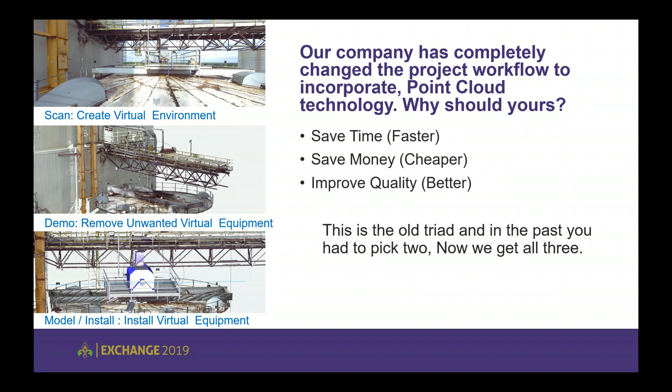How does laser scanning help us? Again, our existing drawings are out of date. They're really no good. We've not done a good job over the years of having as-builts. Our installers have installed equipment that doesn't exactly match the drawings. So as we try to put equipment into these brownfield facilities, those pieces of equipment simply don't fit. We had a lot of collisions and quite honestly a lot of cost on these projects because the existing knowledge of these

facilities was so poor. And typically our prints do not show things like electrical boxes, conduit locations, compressed air lines; everything that we expect in these facilities simply doesn't show up in the drawings, but does show up on our laser scans. And basically the real world is crooked and crazy. There's really no straight lines or round circles. So we needed something to pick that up. We wanted a way to design equipment so we could slide it in within a half an inch of the existing equipment. That can't be done with old school technologies.

The advantages of the scanning: we don't need existing drawings, and I've said that a couple times. We simply scan the area, create a point cloud, and then during the construction process, we can actually measure against the models and the point clouds to see if the equipment's going in exactly as planned.

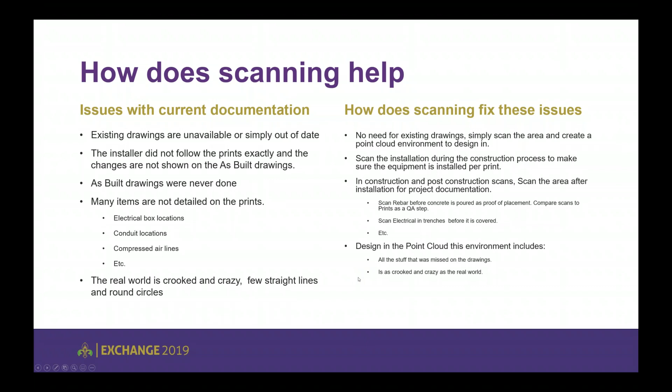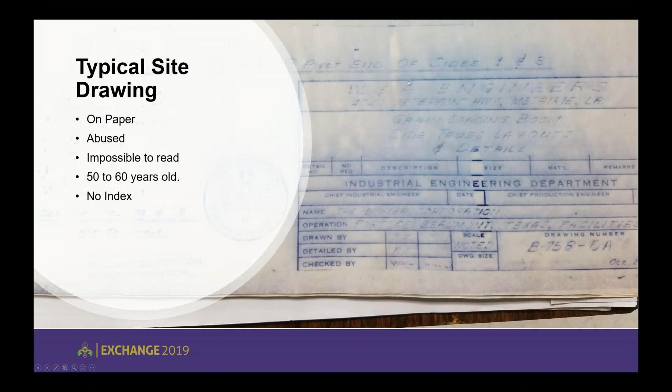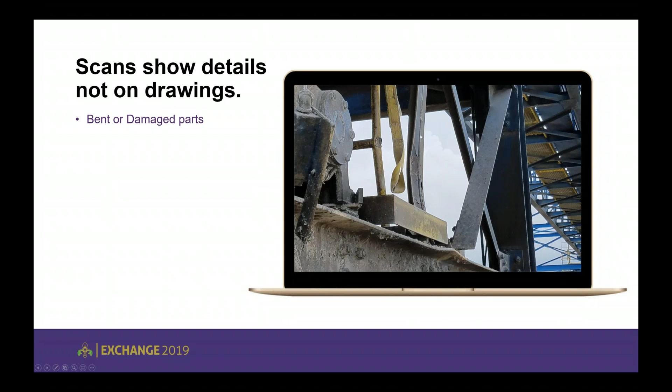I don't know about you guys, but my drawing sets in these old facilities, some of these things are 50, 60 years old, and they've been water damaged, and they're simply abused. The other thing that the scans will bring up is it'll show us the bent and damaged parts. So a lot of times these facilities have been beat on in various ways, and the equipment has been moved around. This will actually allow us to avoid interferences for the existing facility.

Again, electrical parts aren't detailed in any of our prints. Typically, they'll be one-liners, show electrical goes from here to there, but it doesn't exactly show where each conduit is. The picture that I show here is actually a place where we had to replace the conveyors underneath this electrical, and we had to come within a half an inch of this electrical, and there was no other way other than to scan it.

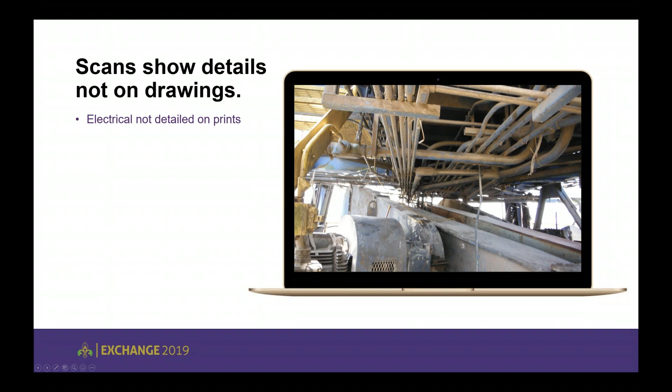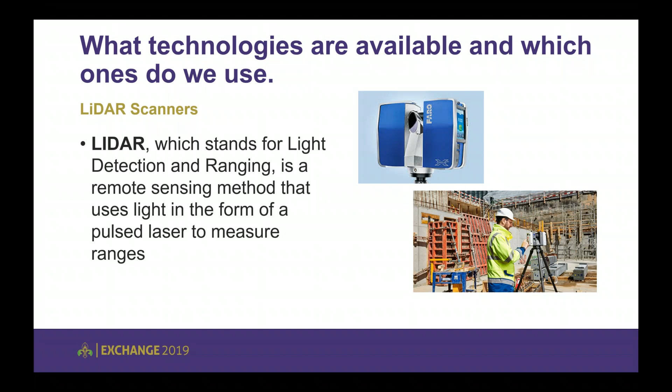What technologies are available and what do we use? Our main technology is to use a LiDAR scanner. It stands for light detection and ranging. They're extremely accurate devices. We have a FARO 330 that we use constantly. It's in the field pretty much all the time.

The advantages, they're fast. You set up a single point scan and it will pick up around 2 million points per second of accuracy. And I'll show some pictures of what these points look like, but basically they're a free point in space that has an XYZ coordinate to them. They're measurable, they're actually colored, so they look like photographs, and they're extremely accurate. Again, over 1,000 feet we range plus or minus 2 millimeters. That's way better than any other drawing that I have.

Angular accuracy, I show it on the presentation. It won't mean anything but 19 arc seconds for vertical and horizontal, which is quite accurate. Captures a really rich point cloud, which I'll show some presentations of here in a minute. There's some disadvantages. Line of sight. Basically, a laser is a beam. It goes absolutely straight. So you have to set these up in multiple locations to get presentations from all sides of the thing. And again, I'll show some of these in a minute here.

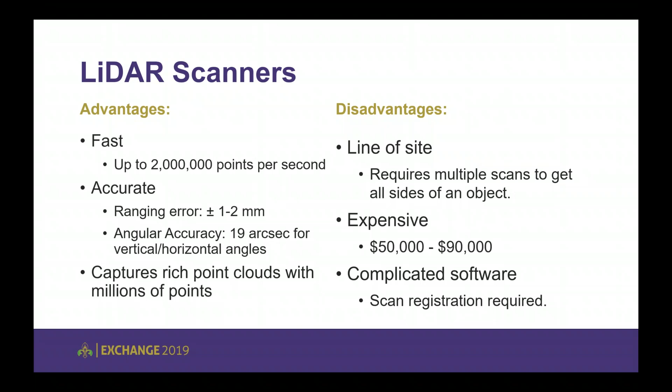They are expensive. You can buy a used LiDAR scanner in the $50,000 range. A brand new setup, latest technology, all that nice stuff is in the $90,000 range. So they're expensive, but I've paid for my LiDAR scanner at least 10 times. Suppliers that we use and recommend, again, I have a FARO 330. It's the one shown in the upper picture. They have a newer scanner which is twice as accurate. Obviously at $90,000, we're not really going to go out and buy another one since ours works perfectly well.

And then Leica is the other manufacturer. If I was to go buy a scanner today, I would buy a Leica. They're much faster. They have the advantage of being able to do registrations, which again, I'll show you some of these things in a second, but they let you do registrations on site, on the fly, and they know when you move them, how far you've moved them. So the whole process with the Leica scanner is faster. It's really no better than the FAROs, except for the fact that a FARO scan for me takes about 11 minutes a scan, and a Leica scan takes somewhere in the 2.5 to 3 minutes a scan kind of thing. That adds up as you do these in the facilities.

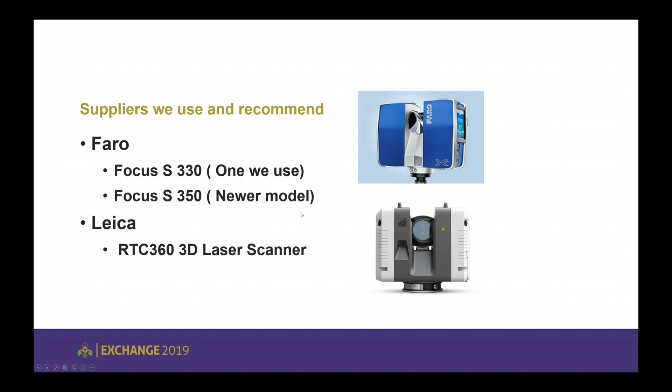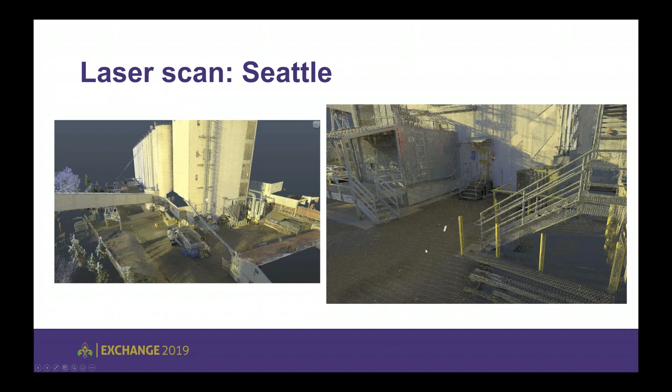We again scan each one of our facilities. This is a facility we have in Seattle. It's a grain elevator and a ship loading facility. What you end up with these 3D scans is very highly accurate positioning of all the equipment. They do tend to be a little bit pixelated, but again, that's a very high density for measurements.

We do use drones and use photogrammetry and orthomosaics. Those basically give us similar point cloud scans. They're not quite as accurate, but for getting to places, tops of buildings, tops of conveyors, all those things, we can merge the information from the drone photogrammetry in with our LiDAR scans, and so we'll get a complete 360-degree view of all of our equipment.

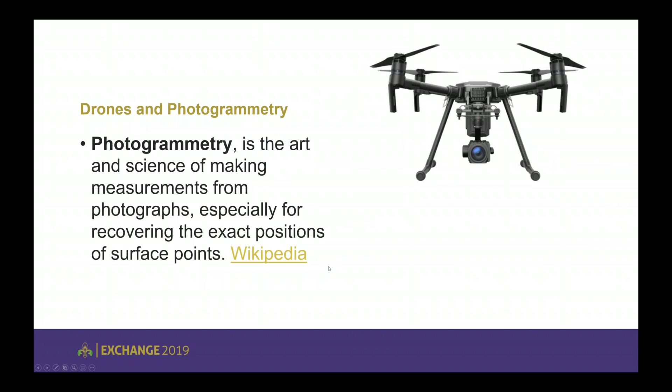What do we see, and what do we do with the drones and why? The drone imagery is automatically uploaded to the cloud. I'll show you the website and how we go about doing that. Its accuracy is about 2 to 4 pixels, which is about 1 centimeter. It captures a really nice point cloud.

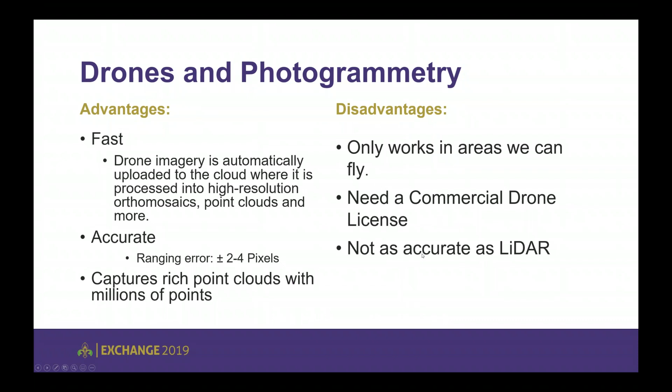Disadvantages, it only works where you can fly, and you do need a commercial drone license. They're not particularly hard to get, but you need to do that before you can fly. Once in a while, you get yourself caught in a place where you can't fly legally because of flight restrictions. They're not quite as accurate, as I said, as LiDAR.

This is a picture of a drone scan of the same facility. You can see that it's a little bit more pixelated, but again, highly accurate and quite capable.

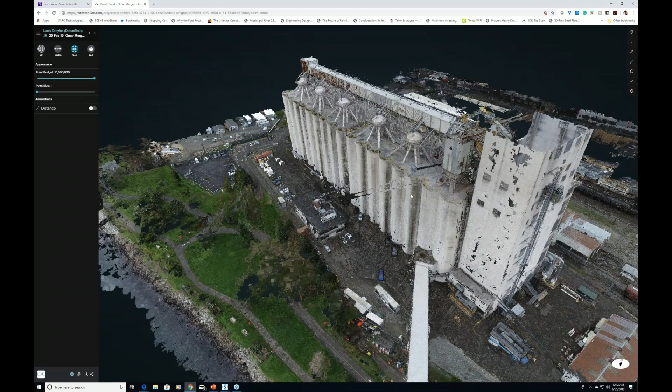I'm going to switch over to the drone software here real quick to give you an idea. This is that same facility in Seattle. This is a series of flights, about 300 photographs of the facility that we've turned into an orthomosaic. This took about an hour to fly and process. So you get very good accuracy in a very short amount of time.

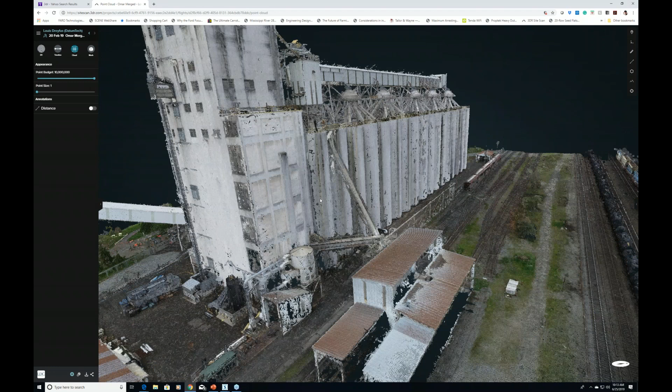Again, very rich information for something you do quickly. We merge these along with our LiDAR scans, so it gives us the ability to build 3D representations of these facilities very rapidly.

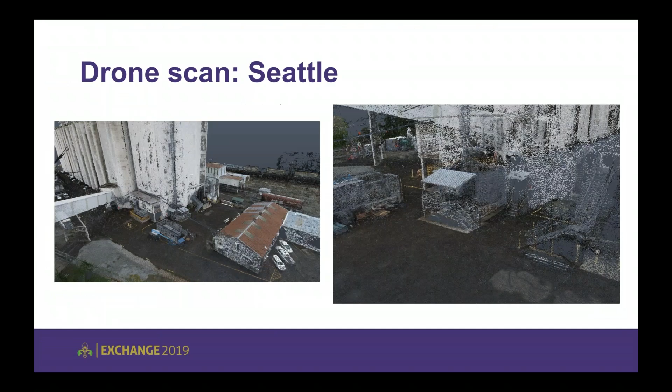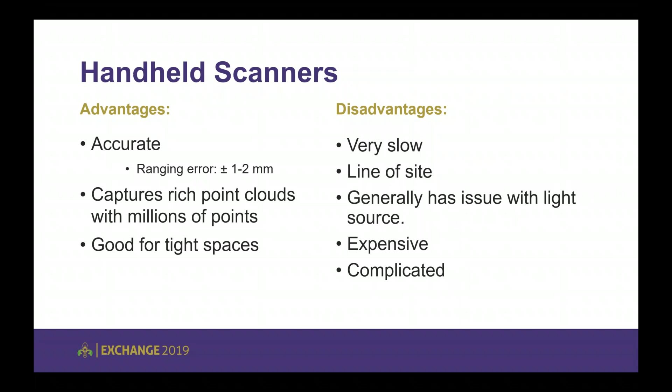The other technology, and quite honestly, we don't use this one, are handheld scanners. You'll see a lot of them out there. They're good if you're going to scan the inside of your car or something like that. They really don't work well. They're slow, very sensitive to exterior light sources. They're expensive and complicated, and we just haven't found a home for them.

The other useful device that we do use is VR viewers, virtual reality viewers. I have an HTC Vive, which is a headset and a ranging thing that you set up in your office. We do virtual reality walkthroughs for our facility. We do them from a safety standpoint - we'll put the safety managers under the headsets - and we do it from an interference standpoint, where we literally put our operators and people in virtual reality headsets and let them walk through these facilities as they are constructed.

Again, software - Autodesk is at the lead of all this stuff right now. We do use SolidWorks, but Autodesk ReCap, Autodesk Inventor, Revit, which is their building information modeling, and then as a free tool, we use Navisworks to pass these things around.

They're really at the leading edge of this technology. We use Faro for doing the virtual reality viewing and the point cloud registrations, which I'll show you in a minute. We do use SolidWorks, but only for 3D modeling, and their point cloud capabilities is atrocious. They simply have stepped over that piece of the world and aren't interested in doing that, or at least don't show it in their software.

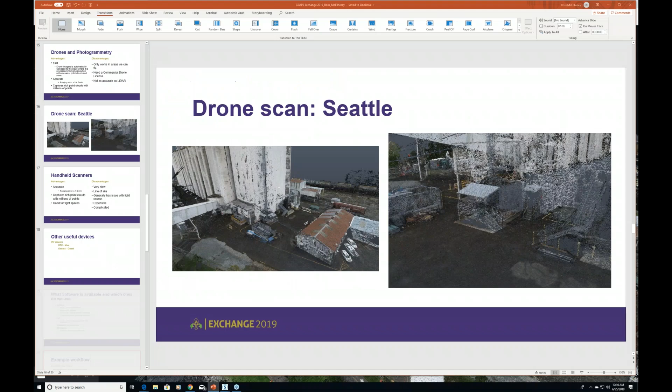Our workflow basically, as I stated before, is we build a cloud point. What is that? I'm going to open up the software for the cloud points. This is a software called Scene. What you're going to see is we will go out to this site, and on the left-hand side, you see I've shot 1, 2, 3, 4, 5, 6, 7, 8, 9 scans of the facility. What you end up with is a kind of dot matrix configuration of the facility. I'll stop here in a second.

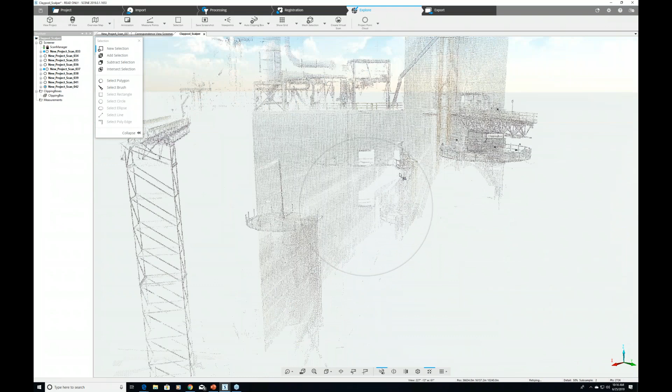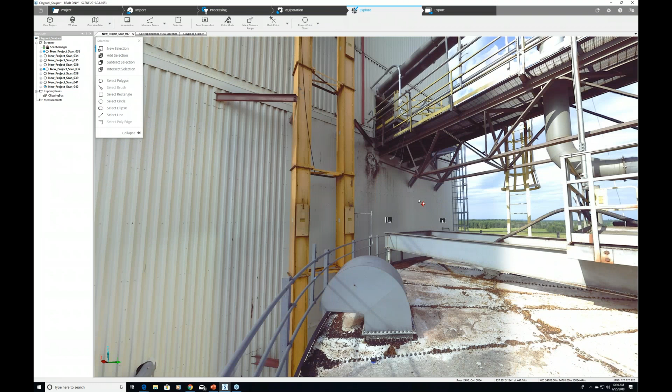What we're working on is this stuff on the left-hand side, where I have an existing piece of equipment, in this case an aspirator, and what we want to do is basically replace it and put a new piece of equipment into it. So you shoot single scans. This is the output from one scan from the laser scanner - again, very, very highly detailed, but it only shows one side of the equipment. In this case, I'm sitting up on the deck waiting for the scanner to finish, because it takes about 11 minutes to produce this amount of information.

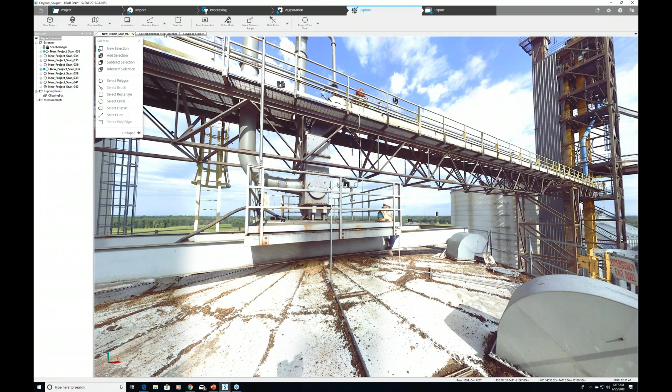Then what happens is you have to position the scanner in multiple locations, and you see pictures of the scanner on the screen - those are the multiple locations where I set the scanner up. Each one produces a portion of the cloud point. So basically each one of these scans, you can see where they were positioned, and each scan is its own thing. I'm going to move one out of the way so you can see it as what it picked up.

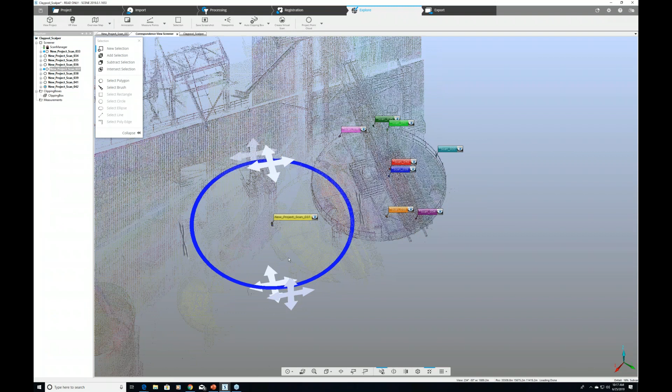And this software registers these pieces of equipment, or these scans, all together into a single basic mosaic of all of this information. From that, we can measure where each piece of equipment fits, or measure the existing equipment that's there, and I can place 3D models into this facility. So I'm going to go back to my presentation. Basically what we do is we build and register CloudPoint.

So we've built and registered this piece of this information.

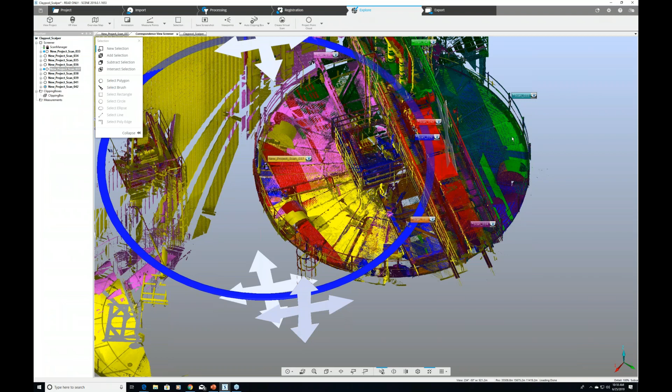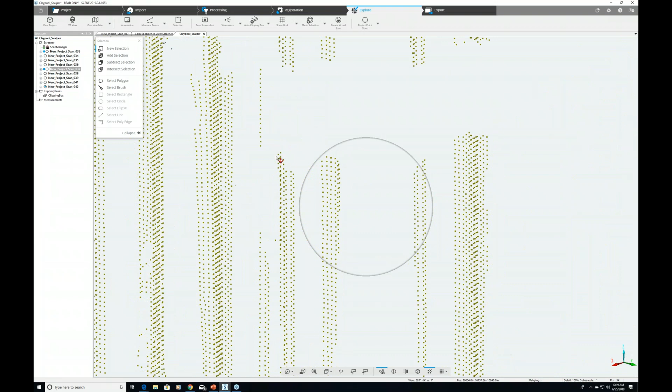If you zoom down to the bottom of this thing, all it really is, is a series of points, dots. Each one of these dots has a position in space, a 3D position. Each one has a color, and they actually are a plane, so they have a direction that the laser shot them at.

So now you have a 3D representation, there it is, of the equipment that we currently have in place.

Then the next portion of this, after we've registered these all together into one big picture, is you need to geoposition them. This looks like a minor point, but you need to place these scans in relative position to the world around it.

Basically, what we want to do is pick on one of these points and be able to get a survey location from it. All of the software allows for tools to do geopositioning. You have to survey 3 points, put those into your cloud, and from that you can geo-position the entire cloud point so that it matches real world. Basically, you can virtually survey points onto the thing.

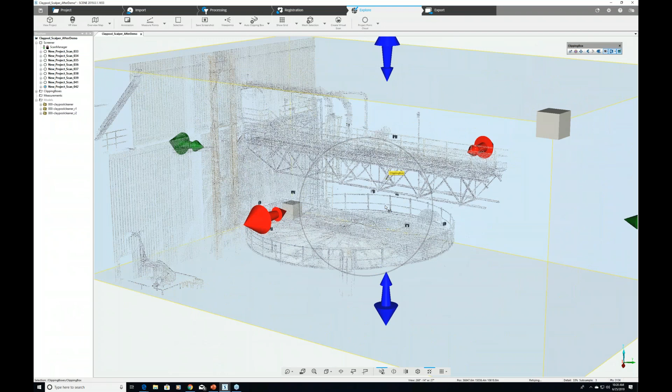Then what we do is create a demolition view. So basically, now let's go back the other way - I set one up for demolition. In this case we would create a clipping box around the outside of this. This portion is a whole lot like Photoshop.

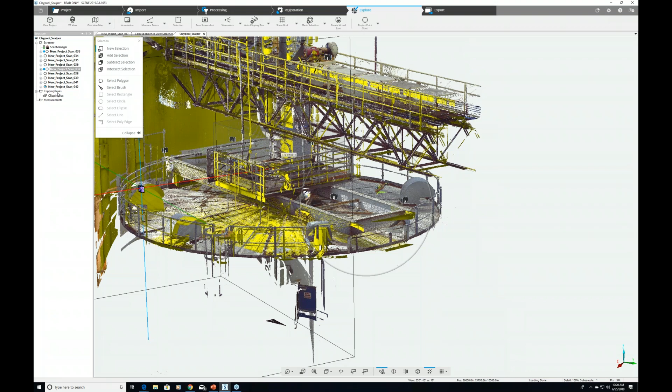Basically, you're going to go in and erase the things that you don't want in the facility. The easiest way to do that is I create a clipping box. So now this is the piece of equipment I'm not interested in anymore.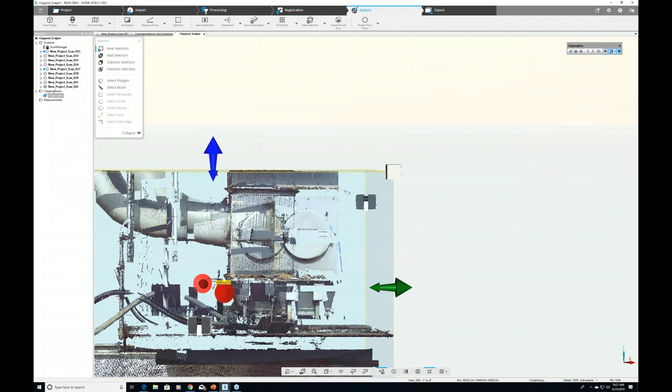We want to virtually remove it like we were doing a demolition in the facility. I would pick a piece of it and say, I'm not interested in this thing anymore, and delete those points.

You would very neatly go back and delete all the things that are no longer required out there, just like you were demolishing them mechanically. We remove all the unwanted equipment. Then we would come in and create 3D models.

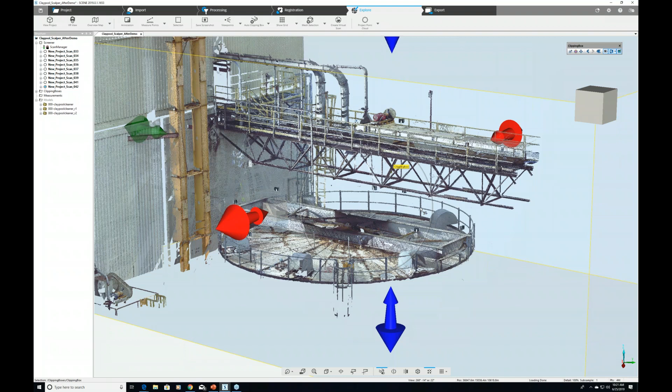So here's the demoed view of that thing. I've taken all the equipment that we don't want in this thing anymore. We went into, in this case, SolidWorks, and created a set of models.

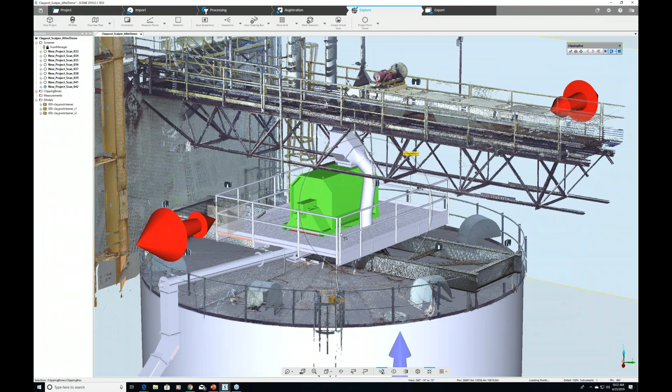So now we've modeled up the new equipment, checked it for interference, done virtual reality walkthroughs with this thing. So now that new equipment is in place.

And quite honestly, we can put this stuff in, and this equipment has been installed in this facility, and I missed that beam by about a quarter of an inch, and that's the level of accuracy that we get.

So now we've produced a point cloud and then installed new equipment into that system. From that, we now have a set of 3D models. I added those models to the point cloud. From that, we can do virtual reality walkthroughs.

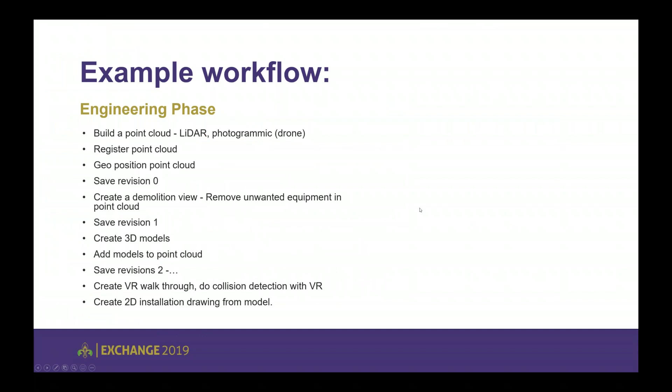Let's go back up here. We've gone through it, talked about all these things, so I'm just going to skip through them. Registering, again, I did that on the fly for you. Geolocation, remove the unwanted parts, add 3D models.

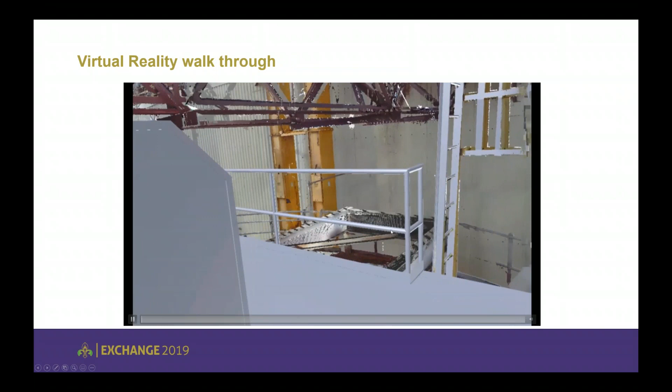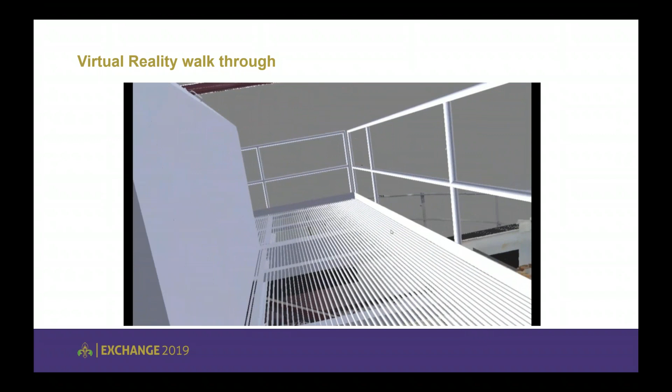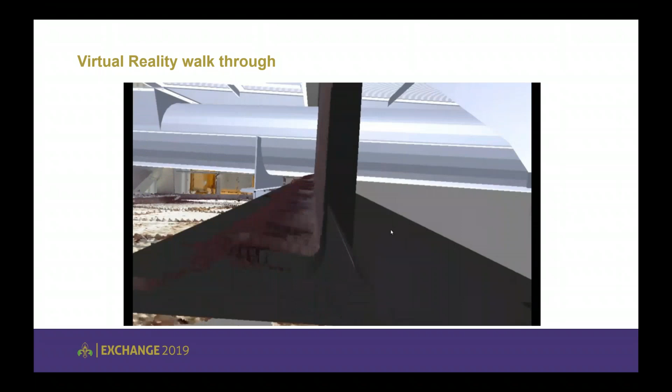And then this is the output from a 3D virtual reality walkthrough. You can actually physically get on the piece of equipment, look for gaps, look for places where your handrail doesn't meet OSHA, look for interferences underneath the thing. Basically, you can go through like you were installing this equipment. Our intent is to be able to do this in field and move to augmented reality.

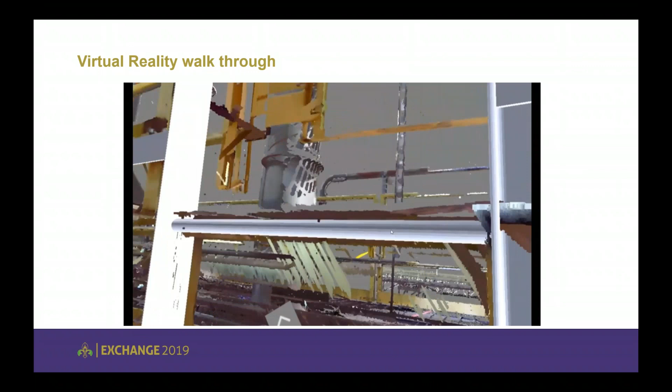Those tools really don't, they exist, but they're really expensive and really hard to do. But basically, we get a virtual environment. The point cloud produces us a virtual environment. We build virtual equipment in the models, and then we virtually install it.

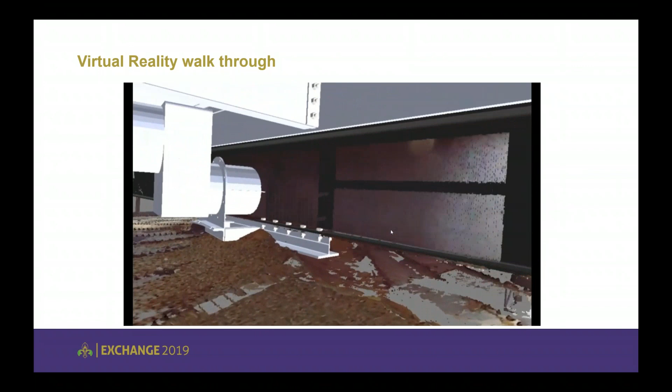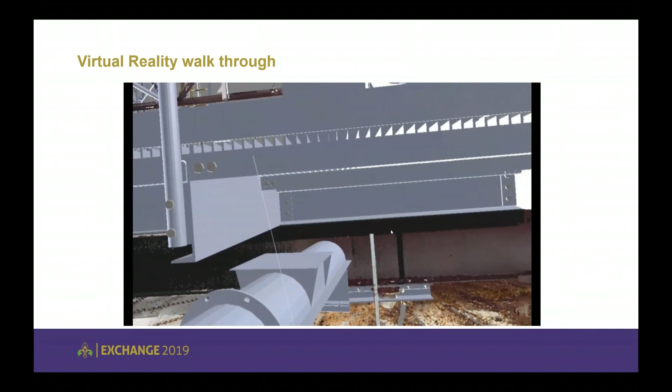So that when we install the real equipment, it's the second time we've installed it because it fits and matches exactly as expected. In this particular case, it's a facility in Claypool, Indiana. We put all the stuff in. Everything fit as planned, and it's now an operating facility.

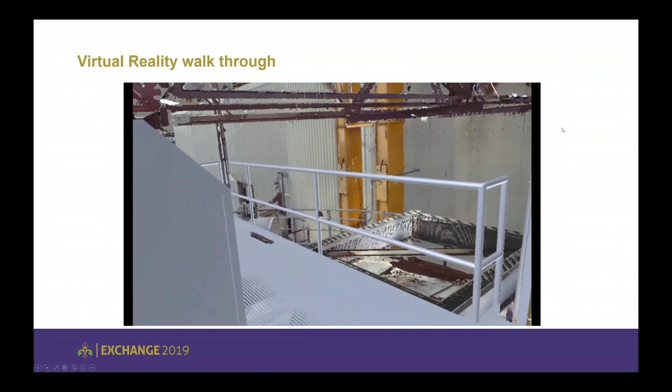Oops. Okay, next slide.

The next piece that we do use the scanners for, and we also use the drones for, is to track and manage.

I'm sorry, I had just an interruption.

We use both our drones and our scanners for this, so we have intermediate progress scans of the facility. This allows you to see literally where the rebar is. If you want to go back and cut a hole in the concrete, you can literally find the rebar and not cut a piece of it, drilling in between them, that kind of stuff.

It works lovely for electrical. We know where our conduit boxes are buried. You can literally dig a small hole, reach down, and hit a conduit box.

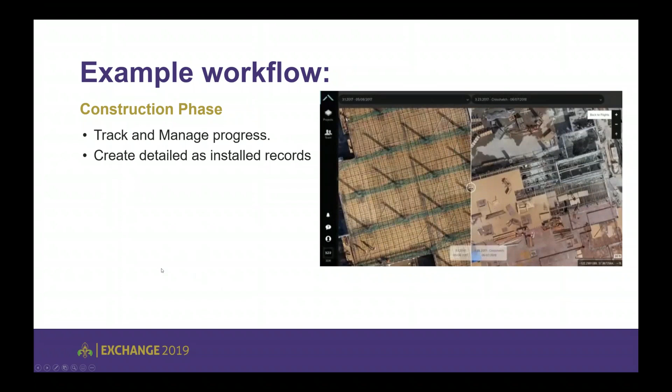We manage and track our projects as we go, create detailed installation records, and then we actually compare the actual placement with the design.

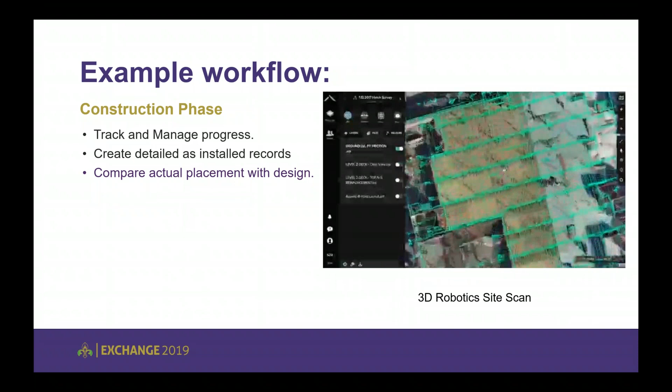Again, this is one where we have drawings of our rebar that we've overlaid onto the scans, and then we go back, place the rebar, and compare it to where it was on the drawings. We go bug the contractors about the fact that they missed a piece of rebar or it's not where it's supposed to be. So this is sort of the contractor's worst enemy in some cases, but they've learned to live with it, and we've built much more accurate, better facilities because of it.

Some common misconceptions on this: we don't use our scanner to reverse engineer existing equipment. We're building a 3D working environment. That working environment is there, it exists. There's really no good reason to go back and 3D model the existing stuff. It's very expensive to go from the 3D scans to an actual 3D model. We have seen effectively no value in that.

We will go back and scan places and put some small pieces of equipment in so we have tie-in points, because the 3D scans really don't show well on drawings. They really work in the environment itself, in 3D. We only model existing structures where the equipment attaches.

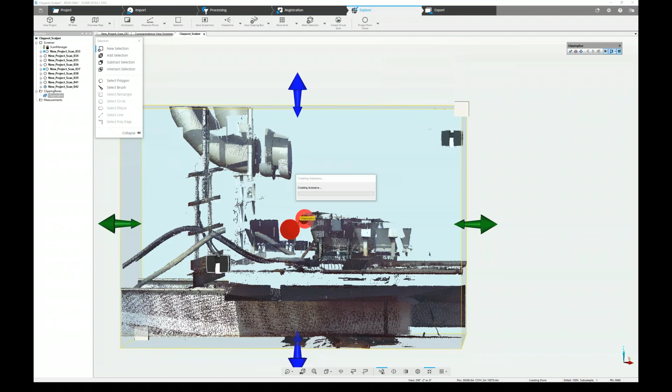Oops. That's interesting. Sorry about that.

We hold the amount of reverse engineering we do to an absolute bare minimum. It costs a lot of money, and we just haven't seen any value in that.

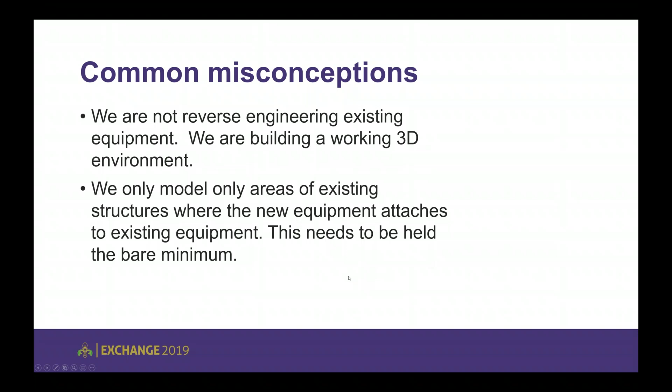I'm going to go back, and I've kind of blasted through this presentation, so we've got some time to kill. I'll go back and show some of these things in the 3D environments that we can actually do, which are interesting.

Conclusion: using point cloud as a working environment greatly improves construction accuracy and reduces installation errors, while reducing engineering costs and not needing to reverse engineer the existing facility.

We think we save something in the 8 to 10% range on these projects. That comes in 2 places: one is this reduces the amount of engineering required to figure out what you already have out there, and it dramatically reduces the amount of rework we're doing in these facilities.

A lot of times we find in the point clouds pieces of equipment that didn't show up on drawings, or conduit boxes that are in the way, or lighting structures that we'd run into. A lot of things like that we can pre-engineer and install right the first time.

It allows us to pre-engineer our structures, so I can bring a large structure into the facility and mount it directly to, say, a concrete silo, without having to do a lot of field fitting.

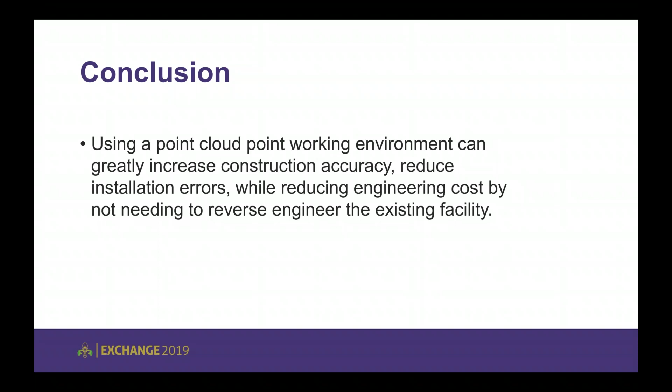In the old school, you would have added pieces of spouting and stuff that they would field cut and do those kinds of things. Today, we don't have to do that, but you need to keep your wits about you from an engineering standpoint to make sure you're allowing for those kinds of things.

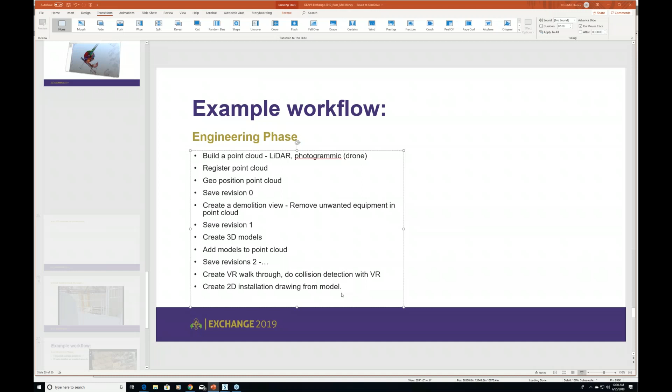That's the end of the formal presentation, but I wanted to go through a couple other pieces of this that I can show you inside of the scan itself.

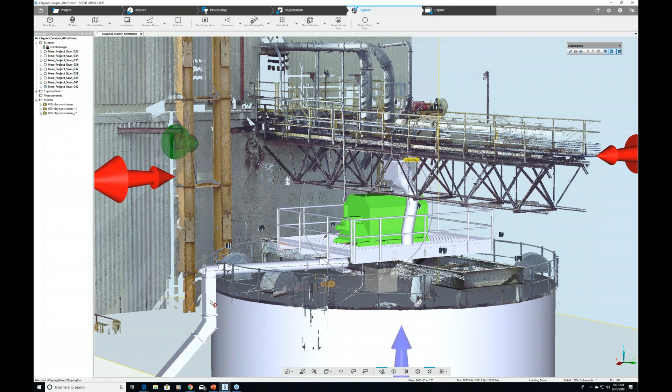Again, we use this on every project. We have effectively abandoned doing facilities without going back and cloud point scanning. We believe the cost of having the interferences and the delays, and the fact that we can pre-build a lot of this equipment. In this case, we completely pre-built this structure that's sitting in here, brought it up in modular sections. It all bolted directly. The cleaner slipped in, the screw conveyor slipped in.

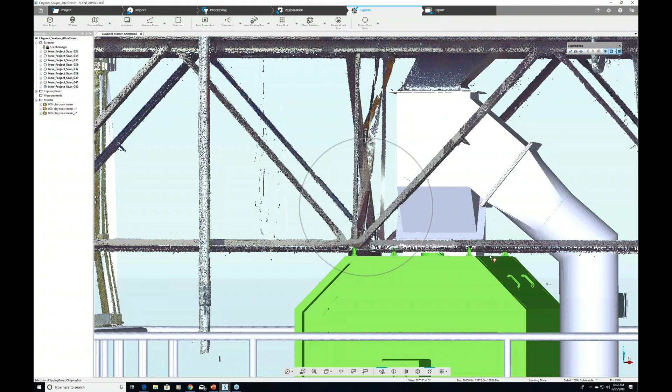Again, I can't press upon you how much having this level of accuracy improves our ability to build things and put them in place. You can see in here, this cleaner literally just barely slips into this configuration. We built these spouts and spouting systems flange to flange. They basically welded one flange up here and dropped this thing in.

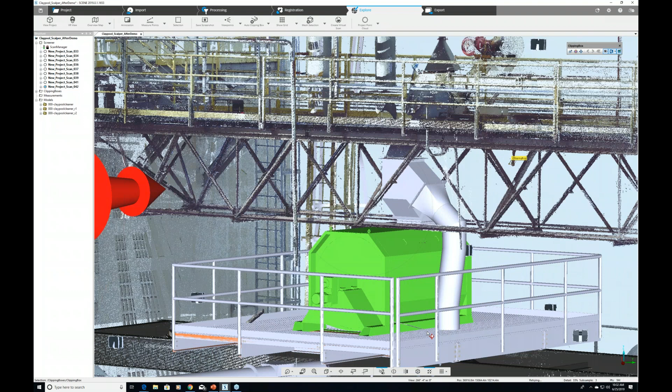So the installation of this took substantially less time. The accuracy was substantially better. We literally could tell them exactly which pieces of conduit to demo, which pieces of equipment to demo out of this thing. It dramatically improves the overall fit and finish of the facility.

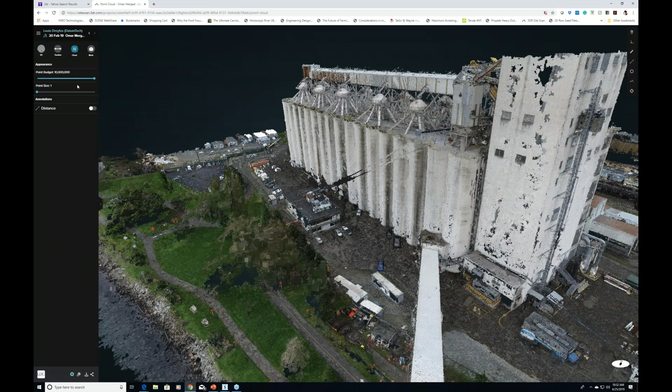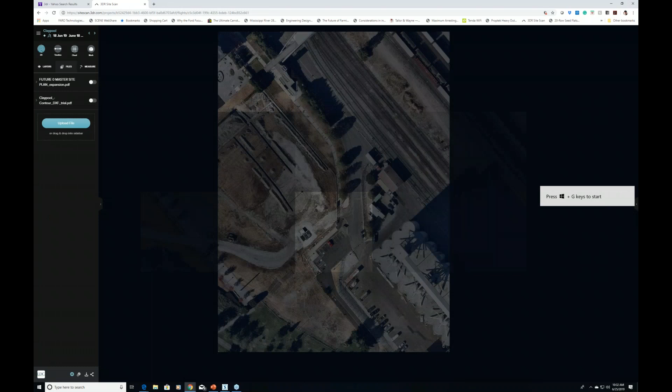The other piece that we've moved to, I'm going to switch over here to another facility. This is a facility we have in Indiana. We use the drone and our point cloud technologies to do our own surveying. Basically, we'll have somebody come in and place a certain number of control points, and then we can survey the rest of the facility within about a centimeter of accuracy, and we can do our cuts and fills from that. So our excavation cuts and fills are extremely accurate.

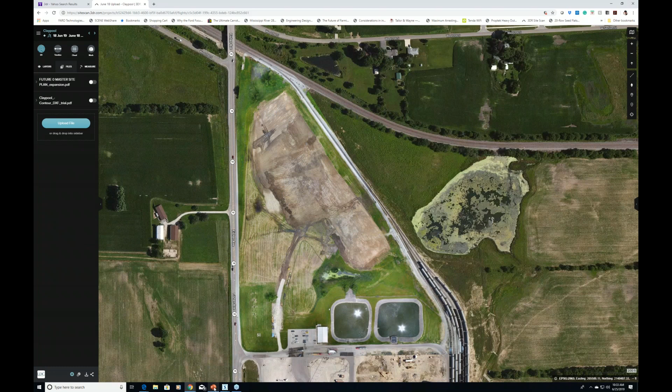So we basically have integrated this technology completely into the way we do business, to the point where we almost don't have a process to do things in the old school way. So I know this is a little shorter than I planned, but that's the conclusion to my formal presentation. I'm opening up to questions and comments, and if somebody wants me to show them any of the other details, I'd be happy to do that.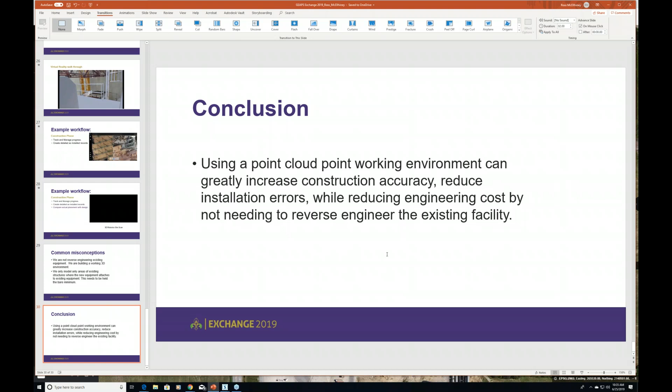The other place that we're seeing safety improvements is walking our safety people through these as a 3D model and a scan. It's helped to get everybody on the same position, handrails, guardrails, slips and fall kinds of things. We've seen actually big safety improvements because of our 3D modeling and our walkthrough capabilities.

The other nice thing about it is I literally have all of these facilities on my desktop, and I can tell you from my desktop what direction each bolt is turned in those facilities. I have that level of detail. We have a big facility in Port Allen, Louisiana, and I literally have about 400 scans of that facility, and I can walk through that facility just like I was there without ever leaving my desk. So that's a huge advantage when you're trying to operate multiple facilities from a central location.

Okay, our next question. Just for an example of time on site, how long were you on site for the example that you showed? The example of Claypool, which is the one that the cleaner went in, I did all of those scans in about 2.5 hours. So I was on site a whole day because you obviously get there and go home and all that kind of stuff. But it took about 2.5 hours. And then at my desk in Kansas City, which is where I live, you would spend maybe another 2.5 to 3 hours registering those scans so that you have a cohesive model.